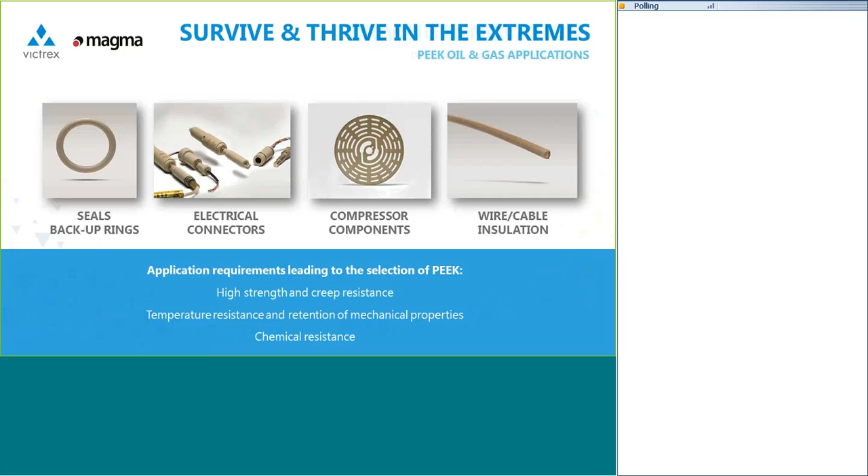Now, moving on to the current innovations, as it were. With the 30-odd years of history in this field, I suppose it's not surprising that people recognize PEEK more for its applications in things like seals and backup rings than in some of these newer areas.

And specifically here, I'm talking about pipes, VICTREX pipes. We have a business which manufactures high performance, high quality pipes in diameters from quarter to around 8 inches, and in lengths at least up to a few thousand meters of continuous length. So that's quite a new development.

And of course, as many of you will have seen fairly recently, we are now a manufacturer of high performance composites, continuous fiber reinforced composites.

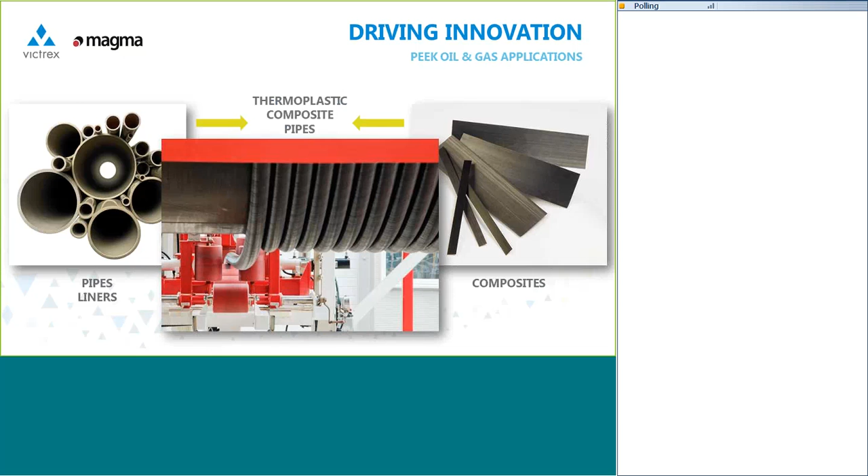Again finding applications in a wide range of industries. And for the subject of today's presentation, both of these product forms from VICTREX are brought together in Magma's M-pipe, Thermoplastic Composite Pipe, TCP.

For the next short section, I'd like to talk a little bit about thermoplastic composite pipes, known by their acronym TCP. These are described in a recently finalized document by DNV GL, a recommended practice, F119, which describes the component parts, function, design, testing, and qualification of a TCP. It's all set out in that document, downloadable from the DNV site.

The DNV document describes basically a pipe precursor for a thermoplastic composite pipe. This is the inner part of the construction, and it bears no significant part in the overall strength of the pipe itself. Its main function is to act as a chemically and permeation resistant barrier. Ideally, it will have a very smooth surface and provide improved flow characteristics for the diameter of the pipe.

And of course, it should be wear and erosion resistant, because you want that smooth surface to remain for as long as possible. The design code is quite explicit in how liner materials need to be tested, and specifically requires that the liner must have proven operational capability at the maximum operating temperature.

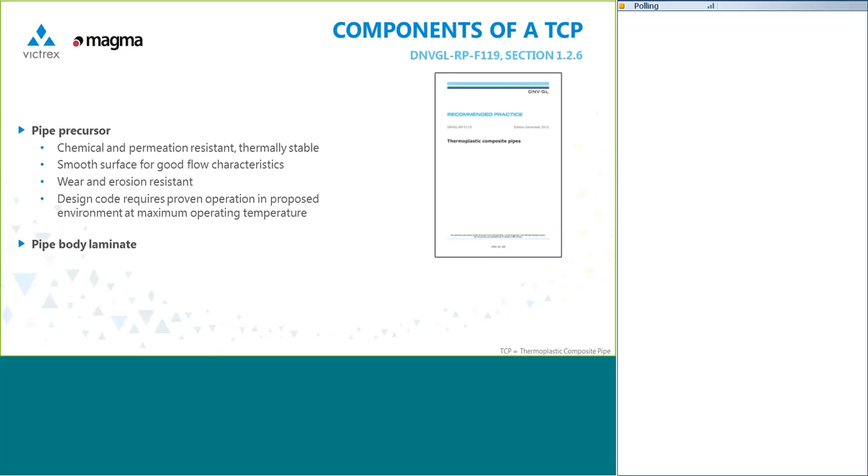Then there is the pipe body laminate. That is the guts of the construction. The pipe body laminate provides all of the strength and pressure capacity of the thermoplastic composite pipe.

Obviously, the mechanical properties of composites are dominated by your fiber choice. First and foremost, if you have a carbon fiber composite, that is going to dominate the properties. But also the quality of the polymer fiber interface matters - that fiber matrix interface is extremely important, and we'll say a little bit more about that in a few minutes' time.

The other point to note in thinking about a TCP construction is that continuous fiber reinforced composites, carbon fiber reinforced composites, would typically be working at a maximum design strain significantly less than 5%, probably more like 2 to 3%. The reasons for mentioning that will become clear a little later in the presentation.

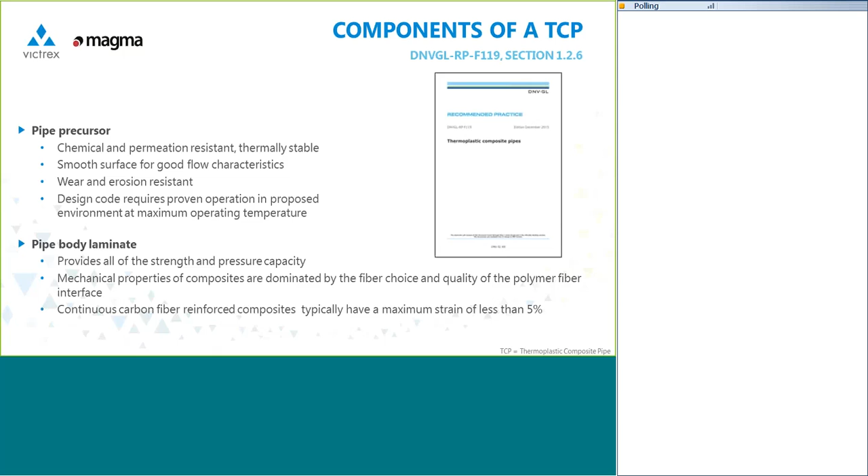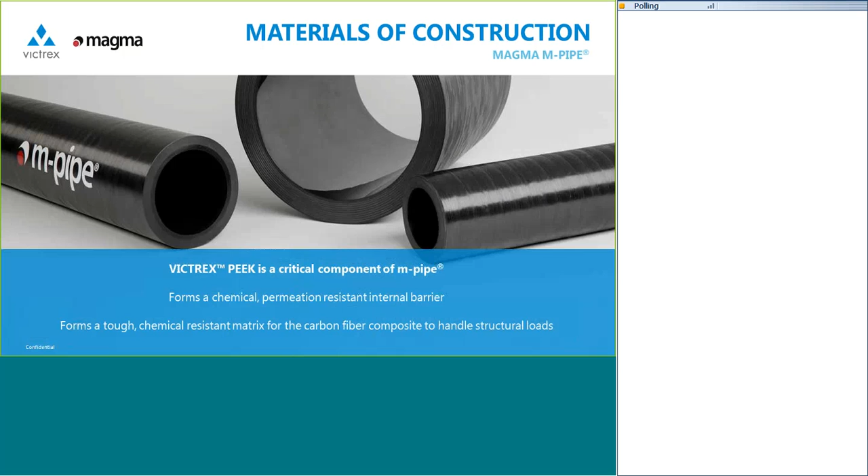So then, VICTREX PEEK polymer is a critical component, an extremely important component of M-pipe. It forms the chemical permeation resistant internal barrier, but it also holds those carbon fibers which are providing all of the strength and collapse resistance. It holds all those together as a very tough and chemically resistant matrix. So that PEEK is clearly very important in both roles.

So when the oil industry began to move towards higher performance materials, needing pipes and tubes of higher thermal and chemical resistance, it was a natural progression to move to extruding continuous pipes in materials like nylon 11 and 12, and of course PVDF. That was just a logical extension, really, of the use of polyethylene and polypropylene.

So, in something of a departure from the norm for VICTREX PEEK, some years ago we invested quite significantly in developing both materials and process technology to be able to extrude continuous lengths of PEEK pipe. These are obviously very, very high performance materials, and being as PEEK has such exceptional chemical and temperature resistance...

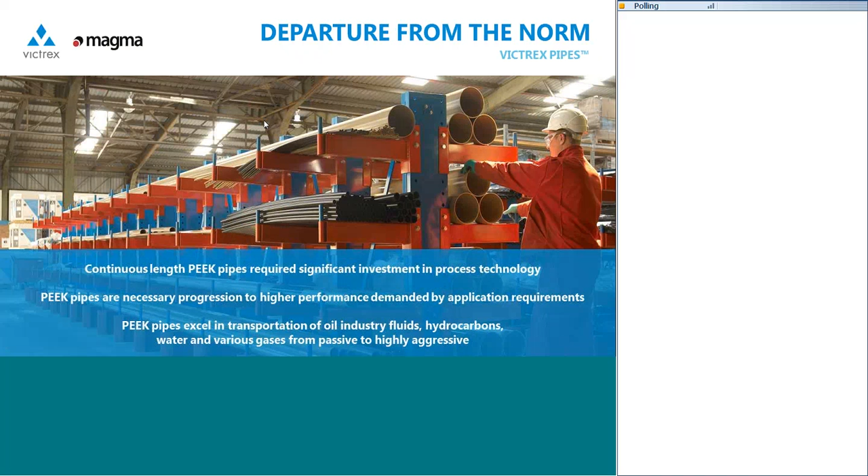This kind of test is one which we employ to demonstrate clearly that we are manufacturing pipes of the required ductility for the application.

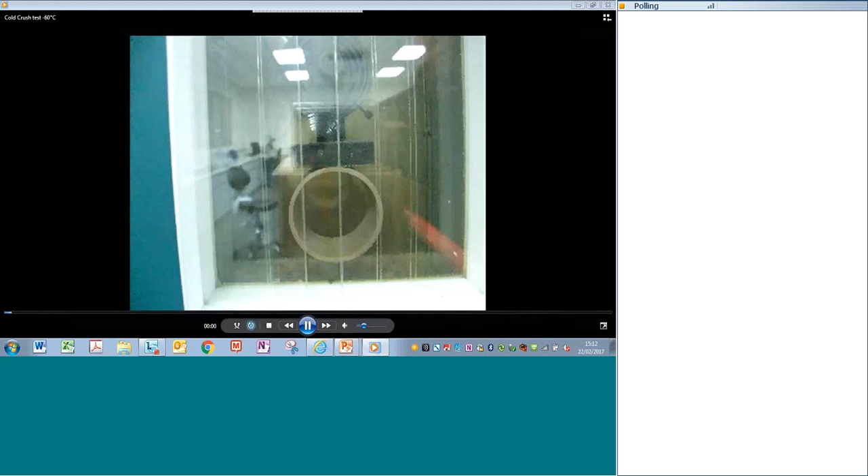If I just accelerate this a little bit for you, you'll see that as the pipe is compressed at a fairly fast rate, we reach a point where the opposing faces actually come to touch, and there will of course be some yielding at the edges. But when the load is released, you'll see that the pipe recovers quite substantially, demonstrating quite nicely the ductility of the pipe as it's extruded.

Now, on the subject of toughness of the pipe, as an industry I think we've tended to talk about toughness of materials in quite vague terms. You'll often hear people talking about impact strengths tested to various standards. Elongation at break is another thing which is talked about, and none of these really give us a very clear picture of how the polymer is going to perform in an application.

Now, in material science, as I'm sure many of you know, there is a quantity referred to as the fracture toughness, a measurement you can make. It's a far more definitive and pragmatic way of comparing materials. It's an inherent property, just like tensile strength or tensile modulus, and it tells us a lot more about the ability of a material to resist the propagation of a pre-existing flaw. So it assumes that all these materials have got the same flaw, and it's a measurement of how well they resist that flaw propagating and freely accelerating as a crack.

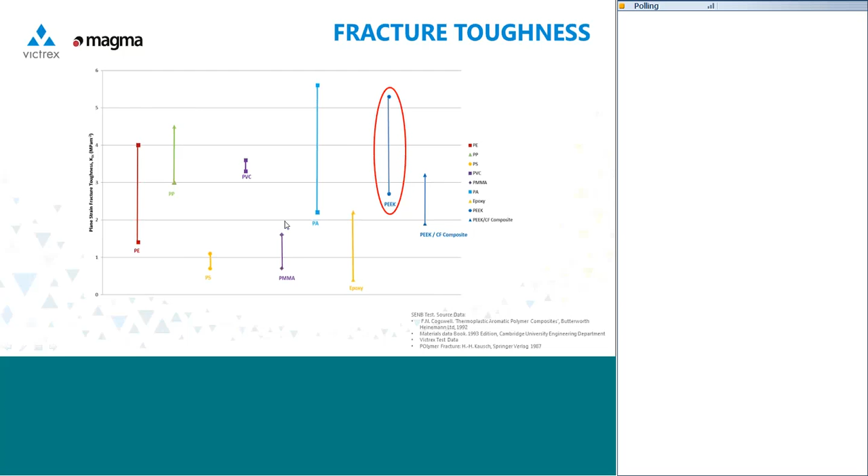What I had wanted to do in this slide was put some parameters around PEEK and other commonly used pipe materials in the industry. However, it is particularly difficult to find that data on the internet. So we've recently run some testing of our own: single edge notch bending fracture toughness testing, single edge notch beam fracture toughness testing.

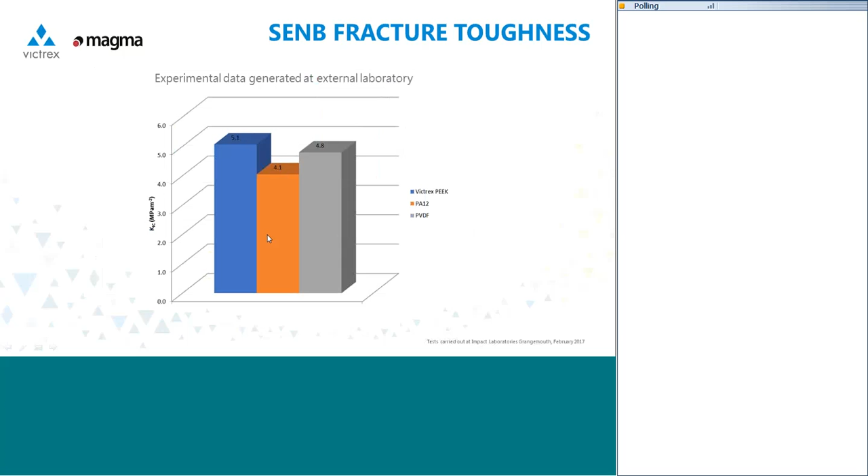You'll see here we've compared VICTREX PEEK polymer, nylon 12, and PVDF polymer, and you'll see that actually there's not a huge amount between them, but in fact the PEEK polymer is the toughest of the three. So PEEK is clearly very well suited as a pipe precursor. It has a very high resistance to crack propagation.

Now, moving on to the composite laminate. As with the PEEK polymer, PEEK-based composites have a very long and extremely well documented history. I think, to be honest, that PEEK is probably one of the most documented composites in the whole of the materials world. It was developed back in 1981, mainly as an aerospace material, but since then it's been extended into medical applications, things like trauma plates which require very high fatigue resistance, loaded brackets, as you can see in this picture, for aircraft parts, which are again critical parts and need very high fatigue resistance.

And in the energy industry, there are already applications in areas such as wear rings and compressor parts. So this material is of course very well known for its high strength and stiffness. It's got an extremely good fiber matrix interface, which we'll talk about in just a moment. And of course, being built around PEEK polymer, it's got great chemical resistance.

The toughness and the fatigue performance are a sum of the materials of construction, and also the interface between the fiber and the matrix. And if you make the simplest of searches on Google or any other search engine around PEEK composites, you'll be pleasantly surprised by the wealth of data that has been published on this material. So we're not talking about a super new material. We're talking about a very high performance material developed for the aerospace industry, and now finding application in a very high performance composite pipe.

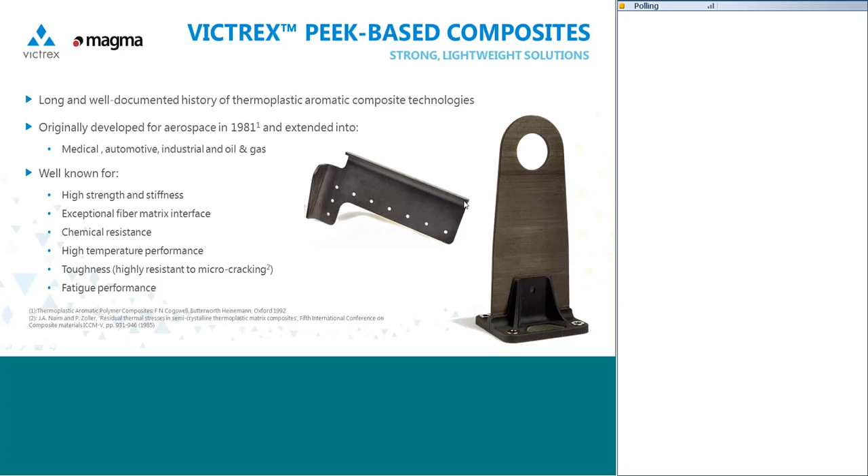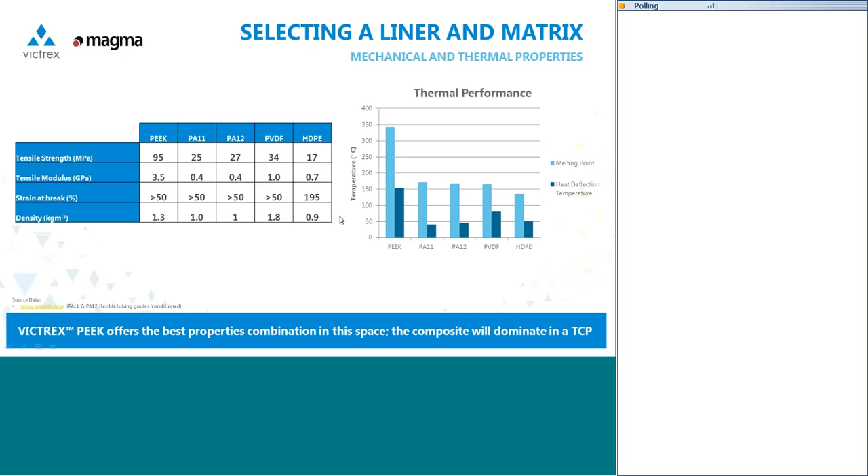Having said that, keeping a completely independent hat on, there will be lower temperature applications where those other polymers may well be adequate. When you're selecting your liner and matrix, your mechanical properties really relate to having a pipe which can be readily handled and used as a precursor for the full composite. The actual mechanical properties then almost fade to insignificance because of the composite which is put on the outside.

What is important about the liner, the precursor, is that it has excellent chemical resistance. This is probably the most important function of the liner.

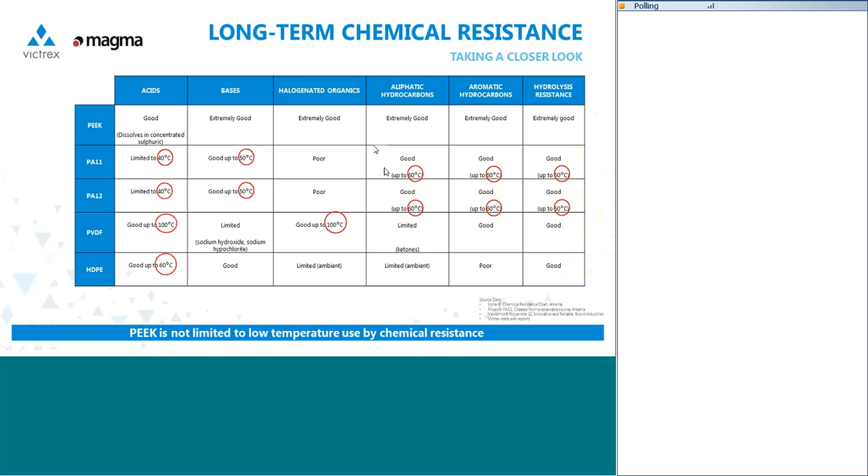Also, lower permeation means slower degradation of the properties in your composite, because aggressive chemicals are permeating much more slowly. But it also means lower susceptibility to rapid gas decompression. The fluids and gases find it much more difficult to travel through a PEEK barrier. Permeation is also quite uniquely, I think, in PEEK, unaffected by saturation with hydrocarbons. So if your pipe precursor is fully saturated after many years of service with a hydrocarbon, it won't affect the rate of permeation through. There won't be a sudden onset of additional permeation.

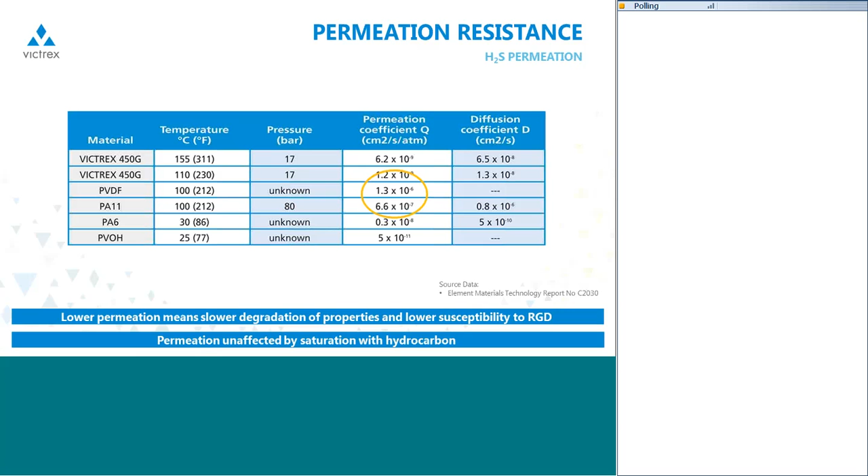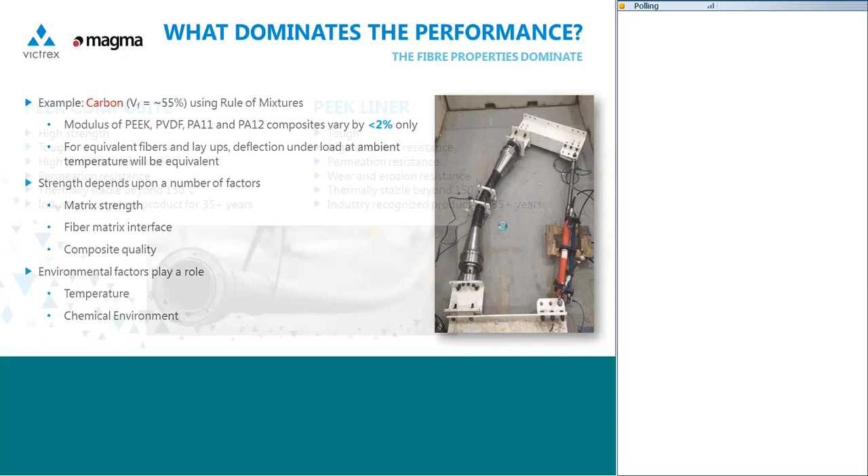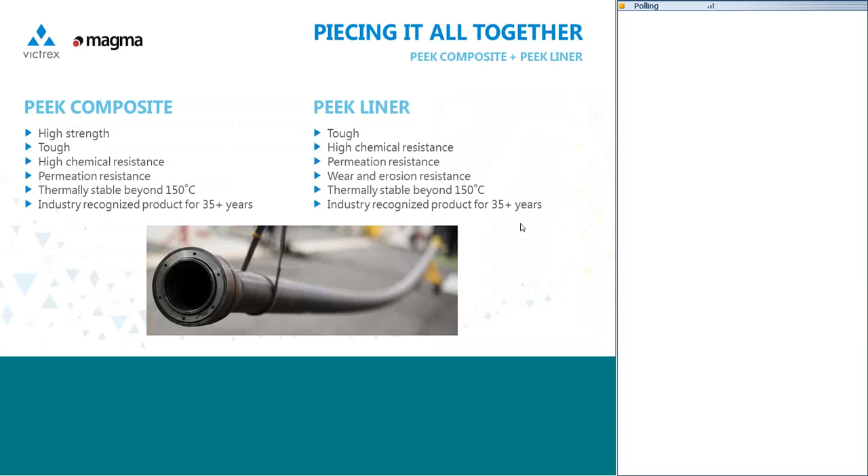Before we move to a polling question, I wanted to talk a bit more about the final toughness of the finished item. It's more than just a combination of the two materials, PEEK and carbon fiber - it clearly comes down to the manufacturing and the exhaustive testing carried out on materials. There's probably enough information for another webinar alone on testing and qualifying M-pipe. Magma have conducted many thousands of tests and achieved outstanding fatigue and pressure performance, and we'll be discussing the whole qualification of M-pipe at upcoming conferences in both the USA and Europe this year.

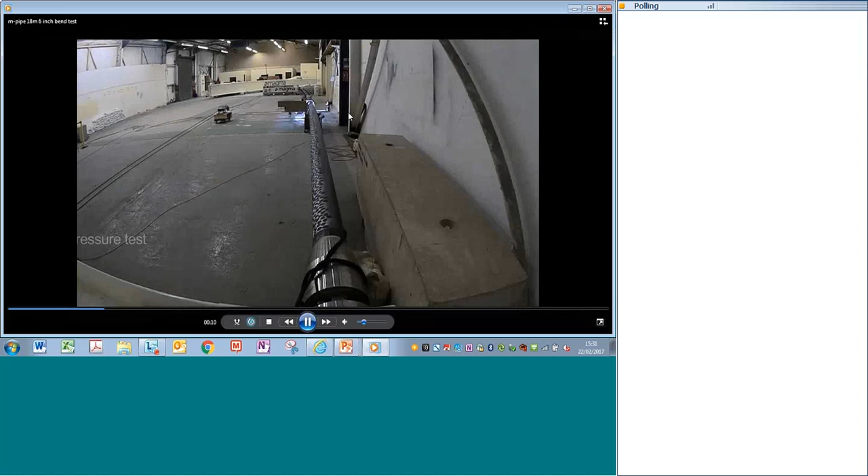Before I hand over to Dan for a polling question and then to Mick, I wanted to share - slightly indulgently - my favorite video clip of the testing of one of Magma's 6-inch M-pipe. This is a full-scale pressure and bend test. You can see the pipe being bent in stages, and then we accelerate it a bit and flex it back. When you actually handle these materials you may question how flexible they are - this gives a great, tangible picture of how they behave in bending.

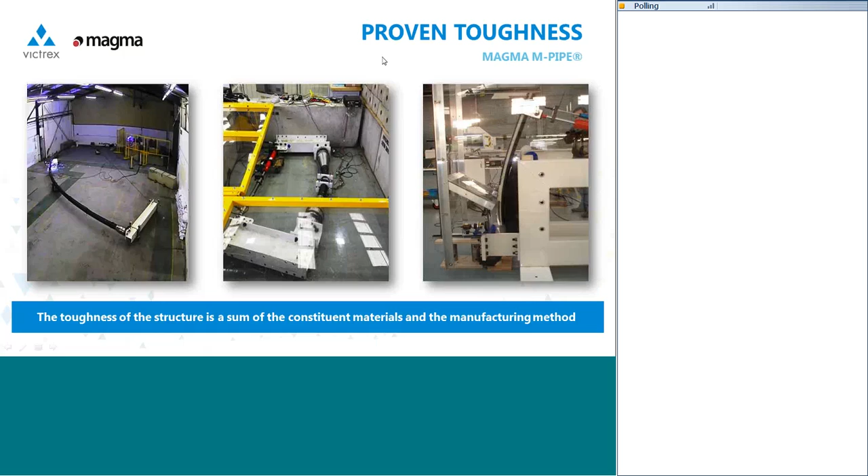So, Dan, I think this is your good self.

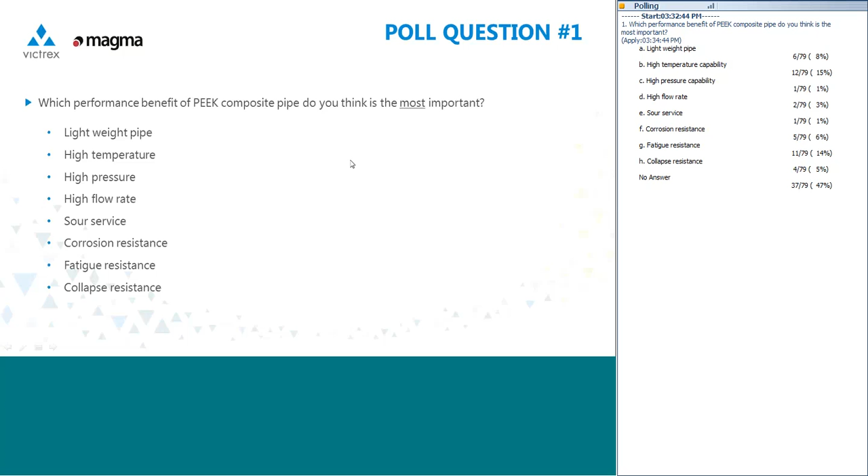Well, actually yes, that's both what I expected. I think high temperature resistance I was expecting to be important. It's very interesting to see that fatigue is an important parameter too - we believe it is, but that confirmation is useful. If I'm honest, I thought corrosion resistance might also be somewhat higher, but that's extremely useful information. Well, corrosion resistance is there as one of the more secondary factors alongside lightweight pipe and collapse resistance - interesting results.

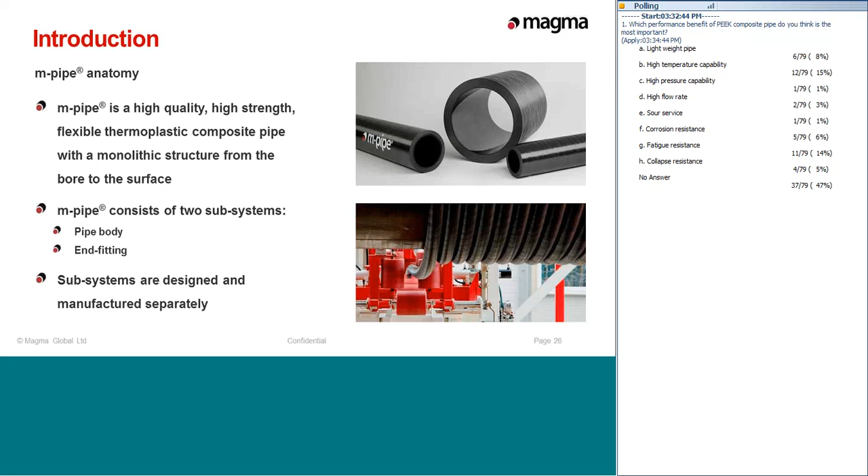Some more details on the pipe body itself. M-pipe pipe body is manufactured from two precursors. The first precursor is the pipe precursor itself, which is extruded from VICTREX PEEK. The laminate itself is built from a carbon fiber PEEK tape precursor. This tape, which uses Toray T700 impregnated with PEEK, is used to build up the laminate.

We believe that PEEK offers the best performance available across a range of polymers, as Jeff has already pointed out. In selecting our fiber, we chose Toray T700 because we believe it offers the best characteristics for the requirements of a thermoplastic composite pipe.

As Jeff has already touched on, it's not only the high performance of these two individual materials that delivers the performance of M-pipe, but the combination of them, the selection and good quality match between the two materials, that adds synergy and gives enhanced performance, which we believe sets M-pipe as best in class in its field.

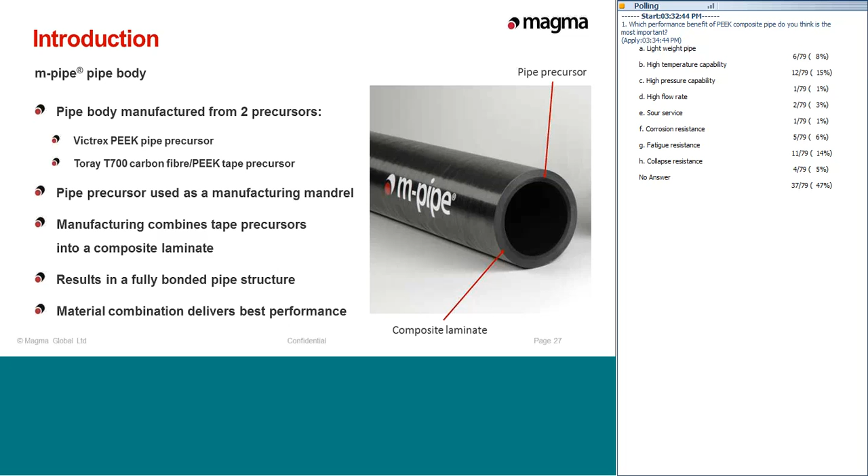So a little bit about the design process and how we ended up there. This really repeats a lot of what Jeff has said, but from a Magma point of view, we've spent a long time early in our development looking at what's the best polymer for the pipe. Our approach is that we want to operate best in class, so we want our product to offer the best performance possible across a range of TCPs. To do that, we identified the best polymer we felt was suitable for that purpose.

Some of the things that were important to us when identifying PEEK as the most appropriate material for a high-performance thermoplastic composite pipe: we looked at its track history in the industry, and saw it was widely applied within the oil and gas industry. It was commonly used in applications like connectors and seals, which proved its excellent chemical resistance and creep characteristics. PEEK has proven performance in extreme oil field environments - it's very good at dealing with sour service, high temperature, and has great fatigue resistance. All of these characteristics led us to believe it's a good polymer for dynamic pipe applications.

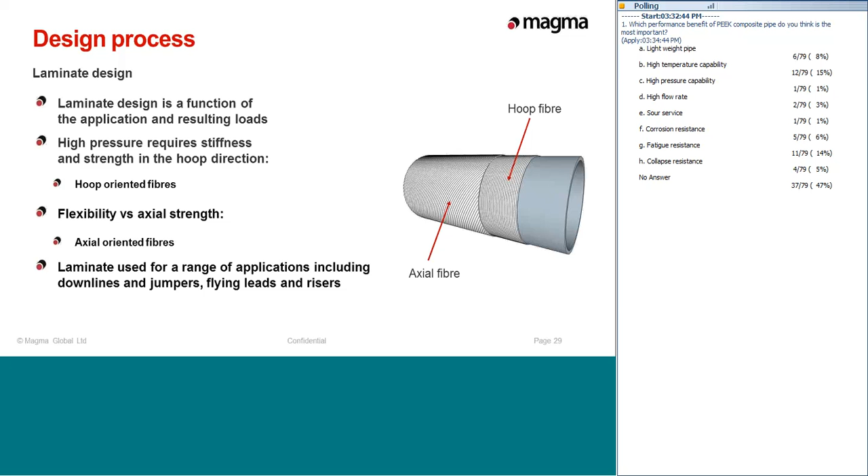So where is M-pipe and how does it perform, and what does it cost? M-pipe is actually lower cost than other non-metallic and non-bonded flexibles of comparable spec. Now, it's quite counterintuitive to think that the best quality product will be the lowest price. But just because we employ higher quality and more expensive raw materials doesn't make the end product itself more expensive.

What we find is that when you combine good quality raw materials, the final product is often better than the sum of the parts that go in, and it's generally better than products developed from cheaper or lower quality raw materials.

There are examples of this all over the engineering industry. I've spent a lot of time in automotive, and in recent years we see composites being adopted more and more in the automotive industry, despite the fact that it's a more expensive raw material. The fact that it can cover multiple functions means that its introduction in applications such as bulkheads and floor panels means it's displacing more traditional materials like aluminium and steel.

So that higher quality laminate that we get with M-pipe allows us to develop pipe with a thinner wall. And that thinner wall for the same specification means that we have a cheaper product.

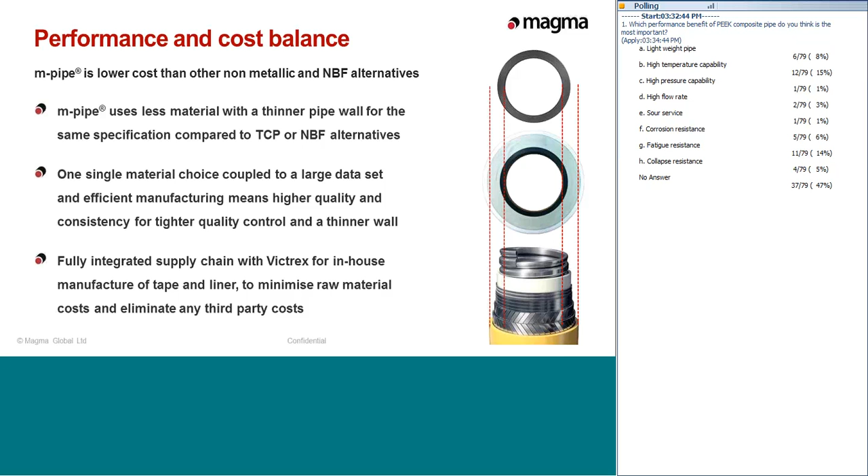So that's really where we are with M-pipe in the market. And then in terms of its development and the progress we've made in developing the product over the last years, M-pipe is qualified to DNV GL recommended practice F119.

Magma have been working closely with DNV since 2012 to qualify our product. Historically, most of this work has been based around the offshore standard C501. Whilst this standard deals with composite components, it deals generally with composite components and not specifically with thermoplastic composite pipes.

Late in 2015, DNV published the recommended practice F119. This recommended practice deals specifically with thermoplastic composite pipes, the approach that should be taken to understand the performance of the pipe, the raw materials in it, and the approach taken to qualify that and show that it's fit for purpose. The approach laid out in this standard is known as a pyramid approach.

So we start with characterizing the raw material, and then we work up, combining this with an engineering model to understand and correlate the engineering model through testing at representative product or mid-scale testing.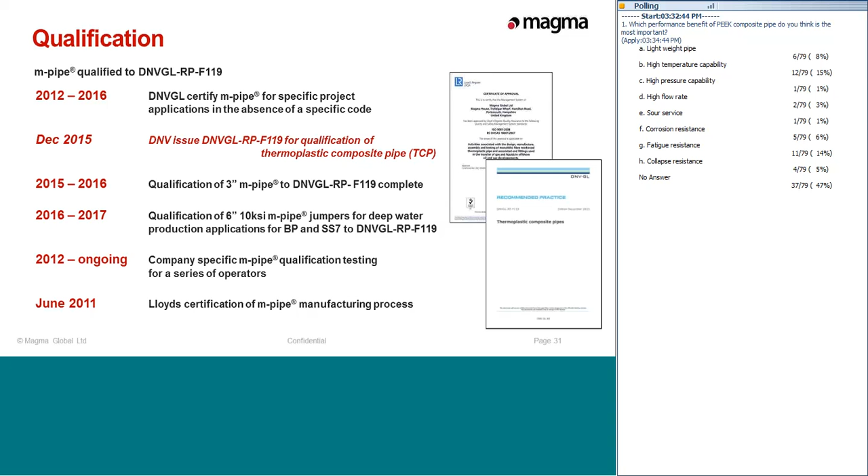Thank you very much, Mick. So yeah, just one very brief slide to kind of close off.

And I guess the main takeaway is that M-pipe is here. It's qualified to an industry recognised standard. It's qualified by and backed up by many thousands of data points, and also very long experience - more than 35 years of experience in the use of both VICTREX PEEK polymer and also PEEK composite materials. PEEK is clearly an essential part of both the liner and the composite matrix.

But of course, in the composite itself, the properties are dominated by the choice of fibre. So the main takeaway, I think, is that by selecting PEEK as a polymer, by selecting M-pipe, you have the opportunity to extend the performance range significantly beyond current, more common, possibly materials. Most importantly, chemical and permeation resistance excel really with PEEK up to and actually beyond 175 centigrade. The matrix material will actually run continuously above that without significant loss of mechanical properties. So you have a very high level of security in choosing this material combination.

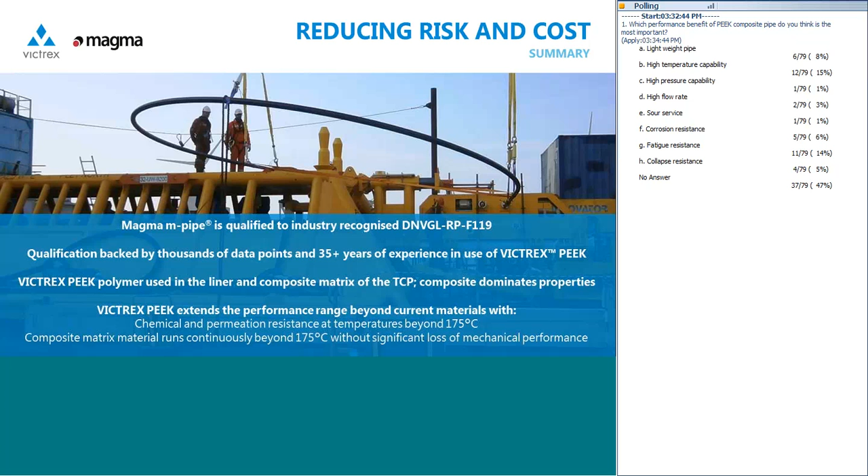So thank you very much for your attention.